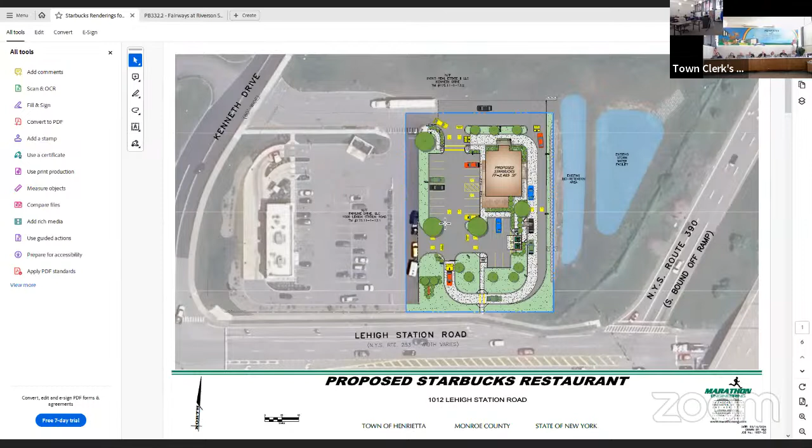Did Luke mention Chris's paper? I had a piece of paper today, it's on my list. I left it right over to him at the end of the engineering meeting. I'm all set, I kept it. Luke, are we good? We're all set, yeah.

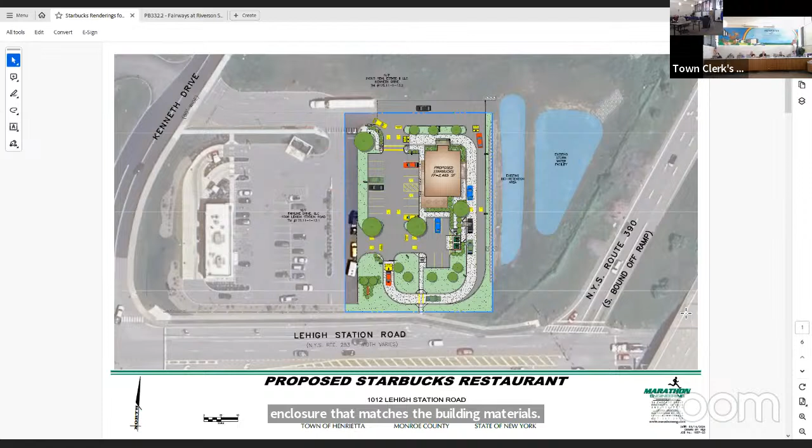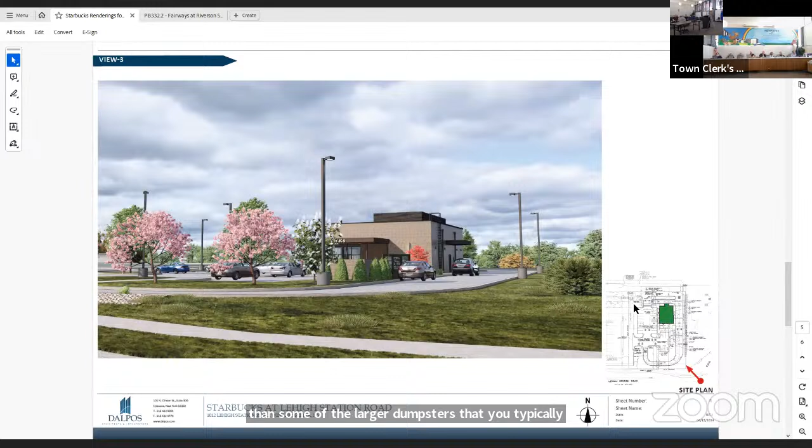We've got a couple of representative visuals from the Lehigh Station roadside that maybe we can scroll through while I'm talking through this. We're also proposing to build that dumpster enclosure at 5.5 feet high with 4-yard dumpsters inside, which are 5 feet high - a little shorter than some of the larger dumpsters you typically see on a commercial site, because we feel this is the least obtrusive location and we're able to screen it as best as possible relative to the views from the external portions of the site.

With that, I'd like to turn it over to John real quick to talk about the building and materials. And I believe Raphael has a box of some of the materials for the brick and wood cladding pieces for the board's consideration as well. We've got those - thank you very much for bringing those. Great, John, you want to talk about the building material a little bit?

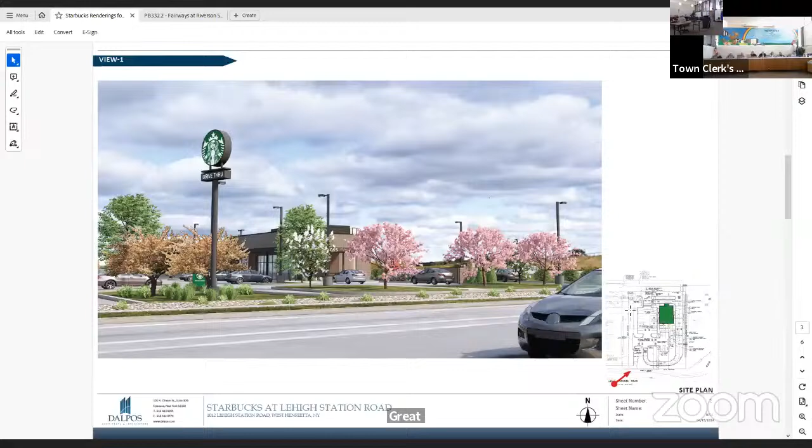Sure, it's organized pretty simply. There's a brick and a wood on the facade. As you're looking at this elevation, the higher level is all brick and it wraps down on the lower left side, as you can see by the Starbucks sign. It's all one color brick, and we just have a different orientation of the coursing - one is stack bond and one is oriented vertically. So on our drawings you'll see brick 1 and brick 2, but it's all one color.

And it's the light color, which I think you have a sample called Manhattan Smooth. That's the brick that's all around the building. There's also a wood - there are 2 colors. The majority of the wood around the building is the lighter brown color, called Weka, W-E-K-A. That's what you're looking at underneath the canopies, on the facade, either side of the glass. That's right, yep.

If you go to the next one, I can walk you through that as well, just so you understand the colors. Same brick right there, same wood underneath the canopy. And as you go around the next two elevations, it's the same brick. On the drive-through side, which would be the following one—keep going, I think, right through. One more—oh, we don't have that view on this one. It'd be on the other side, the other elevation.

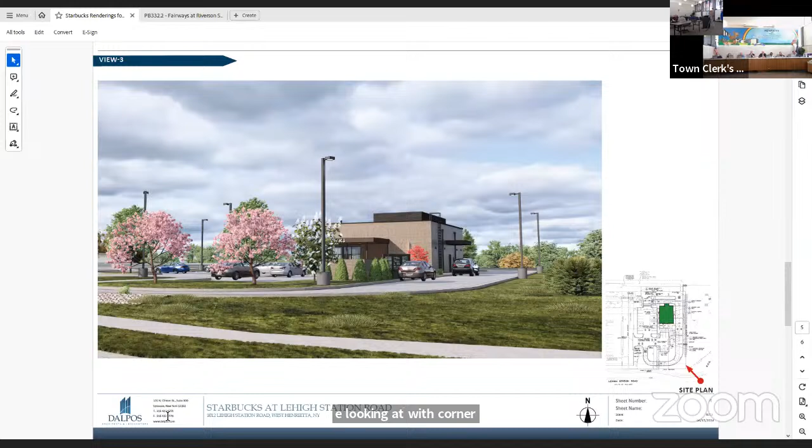And the dumpsters are behind the car—there's a, or behind the green evergreen shrubs. They're also clad with the brick to match the building, so they are pretty indescript. You really don't see them; it kind of blends into part of the building.

And I think if you back up one before this, one photo—this is from the opposite direction. You can see again the green evergreens there, and the dumpsters are behind there. They have enclosures in front, which is colored to match. It's a swing gate which has solid wood slats on it that matches the same color as the brick.

If I understand it from the last meeting, there were some concerns on what this would look like on this elevation. I think we've tried our best to make this blend in with the building, keep it a low profile because it's a very small dumpster, not the size you would normally see. I think we've tucked it in a corner. Matt's done a really good job on site design to get a spot where it's functional, but yet remote enough to not obscure the vision of the building and not stand out from a presence from the street.

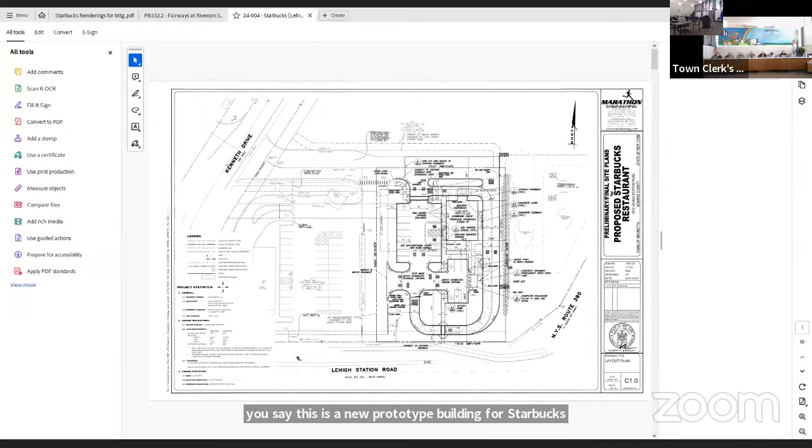Thank you. I really like the aesthetics on this project. Did you say this is a new prototype building for Starbucks? It's a similar building, but a newer color palette and design features for the facade, so it's slightly different than recent built ones. I'm not sure exactly the date these came in, but I know they're relatively recent, in the last couple of months. You've got one up at the corner of East Henrietta and Calkins Roads, and this one to me is much more attractive than that building. So I like this a lot.

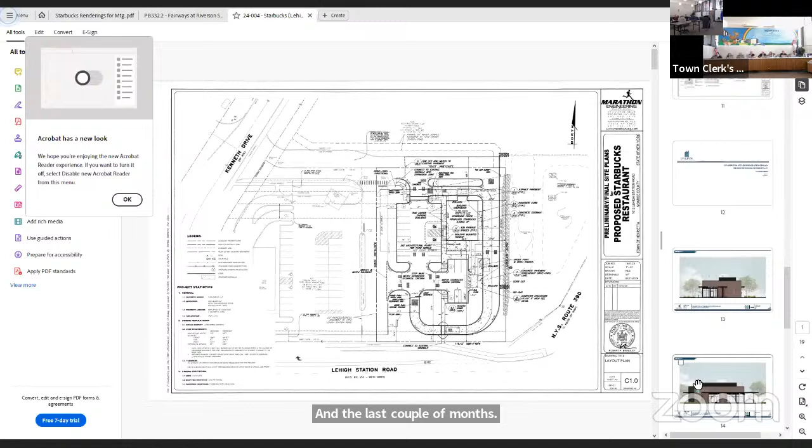Thank you. In the elevation right there, you can see on the far left side is the dark colored wood. That's the other sample we have, which is called Unagi, I think, and we've got it labeled as WD2. Yep, that's the only spot that dark wood shows up. Great, thank you.

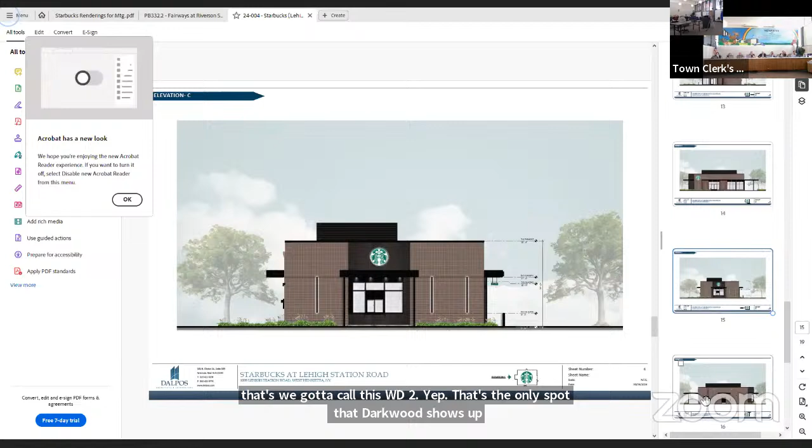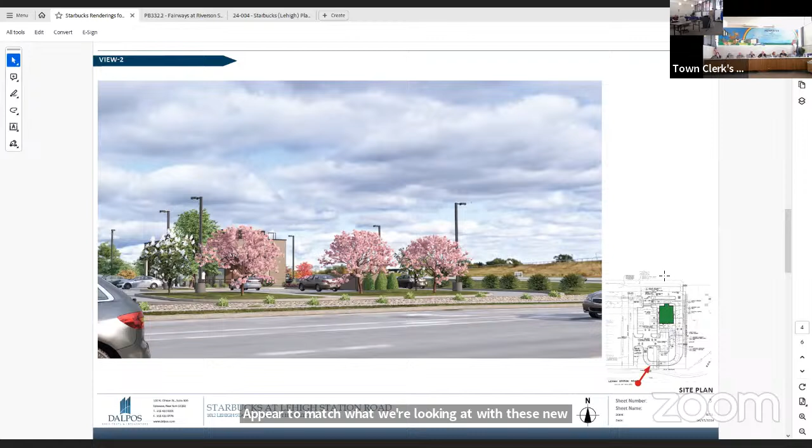I guess maybe I'm disoriented, but the plans on the architectural elevation don't appear to match what we're looking at with these new isometrics. Is the drive-through pickup window on the north side? It is, that's correct. But this small slide shows it on the east side. There's a small canopy over the egress door there for employees taking trash out, that kind of thing—that's not a drive-up window, that's a service door. Okay, I was—so I apologize, that was my orientation issue. That looked like a drive-up window cover.

Okay, so going back to some of that facade, I think there was a comment from the Conservation Board, maybe to dress up that east side. I know you do have four visible sides here, but the back end of your restaurant, in a sense, faces a very busy 390 off ramp. So I don't know if that can be facaded to maybe look a little more storefront with some windows or something. Yeah, great question, Craig. The Conservation Board had our straight-on elevations, but not these perspectives—we didn't have these done in time to get to the Conservation Board. There are some wall sconces with lights on there, and the canopy itself is intended to help dress that up a little bit.

Because this is the back wall where all the kitchen equipment and everything else is, I'm not sure that we can add too much more. Although I do know that the owner intends pursuing approval for a sign on that side because of the visibility.

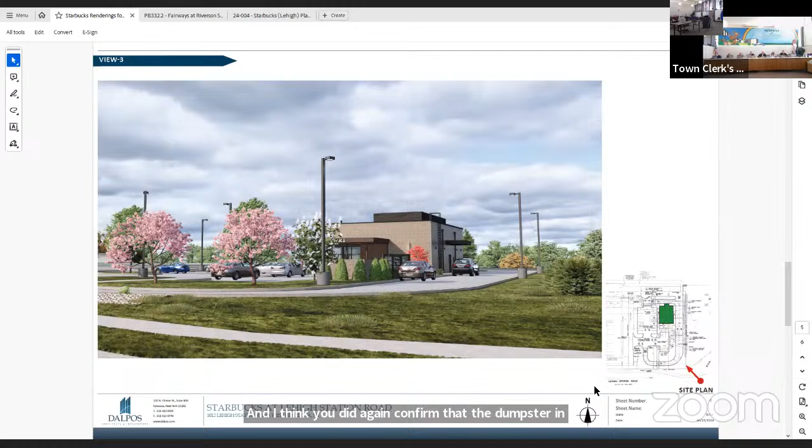Going back to my comments, you mentioned the dumpster enclosure. I like it, I know we're acquiescing to a 5-foot enclosure so it doesn't block the front entrance. And I think you confirmed the dumpster in there will be lower than the 5-foot enclosure? Correct, and just to clarify, the enclosure will be 5'6" because the dumpster is 5 feet high. So we're going to 5'6"? Yep, okay, good.

That probably works. I know we usually go to an 8-foot board, but that was going to cover the whole front end of this, we thought. So we are taking a look at some of that going forward with maybe some alternate height changes.

One of the other comments I had was really kind of internal. Did we take dedication to the sewer yet from Taco Bell? No, I believe it's ready to take dedication - don't let Heather yell at you, or I will. Thank you, Mr. Eckert. You're welcome.

So yes, we haven't taken dedication yet, but we plan to at the May meeting. Okay, so that's just paperwork on our end to make sure that tying in and everything works well for you.

One other question that I had was based off of lighting. I see a 25-foot pole here. I couldn't tell, looking at the plans that were approved for Taco Bell, the height that was approved there. I'd like to see if it would be similar, but I can't tell if 25 was approved or not.

And then the second question that goes on this, something that I've been asking for going forward, are comm checks on lighting. So if we can get a comm check, which is an energy code compliance anyway, get a copy that it meets the comm check.

Okay, yeah, typically we would have something like that accompanying the building permit, Craig, but we could definitely advance that if needed. These are LED lights and no issue, I don't anticipate meeting that.

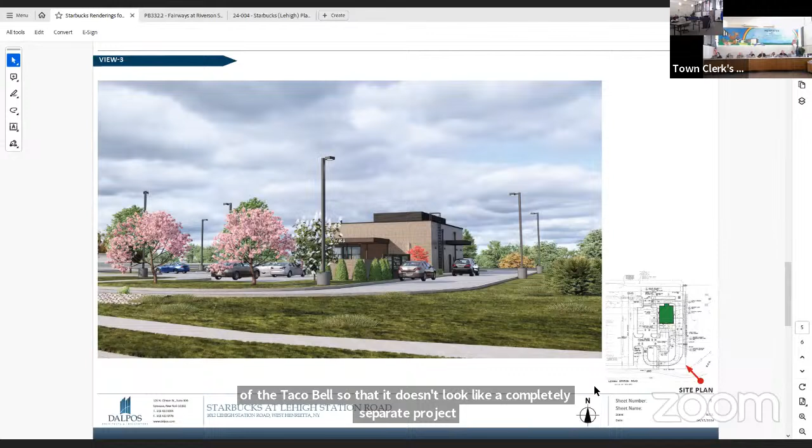And that's fine, so matching is fine, I just didn't want them taller. You're welcome to go lower if that helps your ambiance and helps your light spread a little bit better. I'm not opposed to lower.

The comm check can come in with a building permit. There's no need to advance that as long as it gets brought in with the building permit, we just make sure we catch up with that later. Okay, those are the end of the comments that I had, Mr. Chairman.

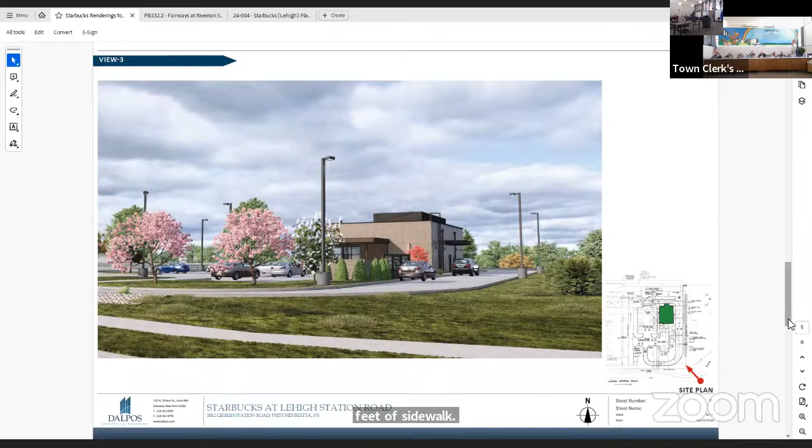One thing, I know you talked about the covered patio, and I see on both sides of that patio you have about 7 feet of sidewalk from where the cars will park. Is there going to be an extra barrier if a car jumps a curb, like a wrought iron fence or something? Yeah, I believe there's a low fence shown there, but Starbucks does have patio enclosure requirements that attach to the columns supporting that.

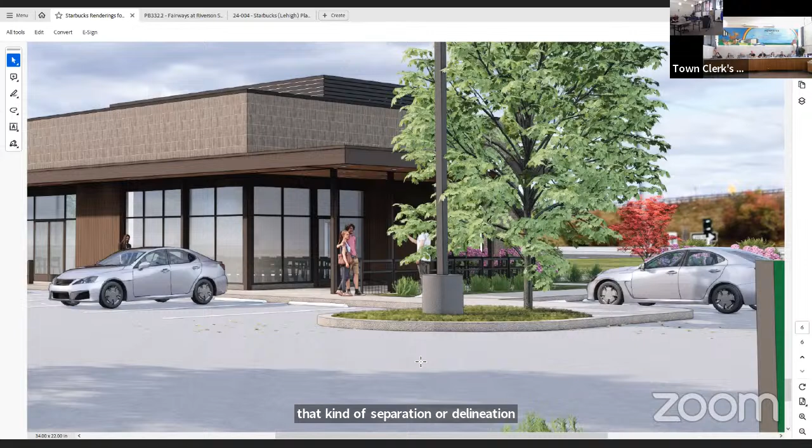So you're saying the columns act like a bollard? Well, the columns are there, but there's fencing between the columns for that separation or delineation. I'm just talking about something strong enough that if a car does jump a curb, we're okay. I'm not aware of any special protections on those columns. I don't believe they're intended to retain a vehicle.

So Chris, have we ever made anybody do anything structurally sound like that? Typically with outside patios, we just make them put some type of fencing around there, as you said, to prevent kids from running into traffic. And the curb is there to stop vehicles, obviously, and we will have full depth curb through both of those sections. Yeah, and I can see that on the elevation, so that's cool. All right, thank you, that's good.

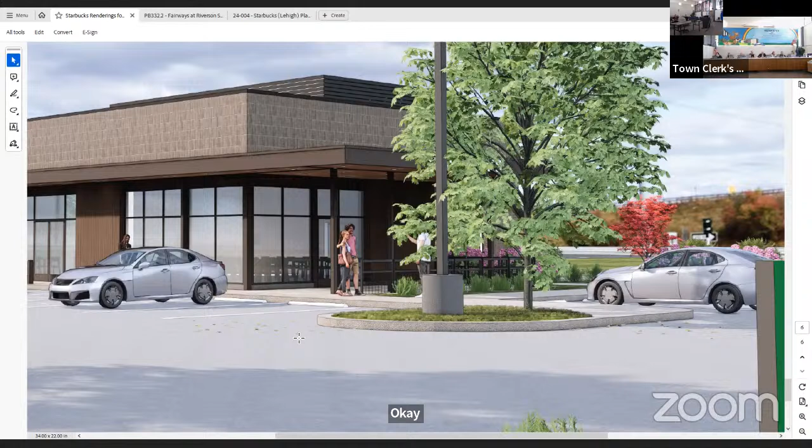I guess we can wait a bit. We just gotta make sure that we do something about the variance on the setback. Yep, and that's all I have, thanks.

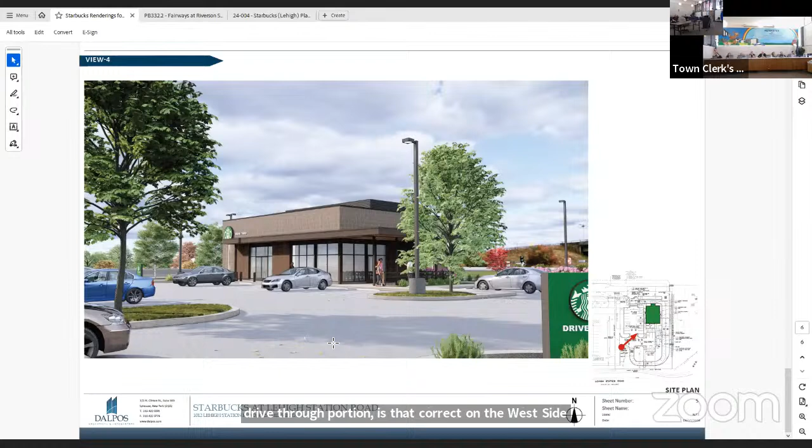So if I'm looking at the traffic patterns, there's two ways to get into the drive-through portion, is that correct, on the west side and the north side? Both of those drive lanes, if we could switch back to the colored rendering. Yep, both of those drive lanes are two-way drive lanes on the north side and the west side, with a single entry point proceeding south from where the cursor is into the drive-through. That's correct, so that's where the clearance bar would be located, right at the start of that concrete paving area.

Gotcha, and thank you. And the sidewalk that goes across the drive-through out to the sidewalk on the south along Lehigh Station, is there going to be any type of safety barriers? I don't know why there might be foot traffic coming across there because there's not really anything across the street, other than some businesses. So what type of safety precautions would be in place?

We are showing a striped crosswalk there and could entertain a pedestrian crossing sign as well. We do not anticipate a lot of pedestrian traffic, but accommodations were made for pedestrian circulation internal to the development and out to the public right of ways, so we are also including connection to the driveway that comes in along Kenneth Drive, to the sidewalk and crosswalk there for folks walking from adjacent businesses or along either Lehigh Station or Kenneth.

Okay, thank you, that's all I have, Mr. Chairman. Thank you, Mrs. Reynolds. Chair will recognize Ms. Safranek. Good evening, I think most of my questions have been answered. I do appreciate the thought that has gone into the landscaping and the design. I think that's going to be a nice addition.

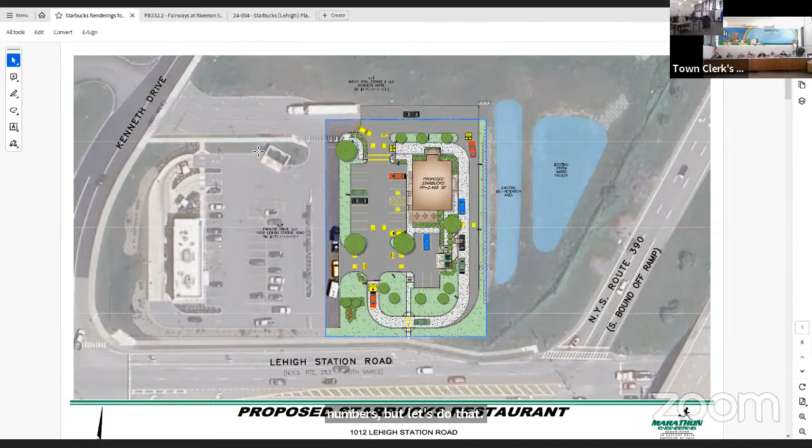Motion for the variance. I don't have the actual numbers, but let's do that for the setback distance: to reduce the rear setback from 60 feet to 39 feet.

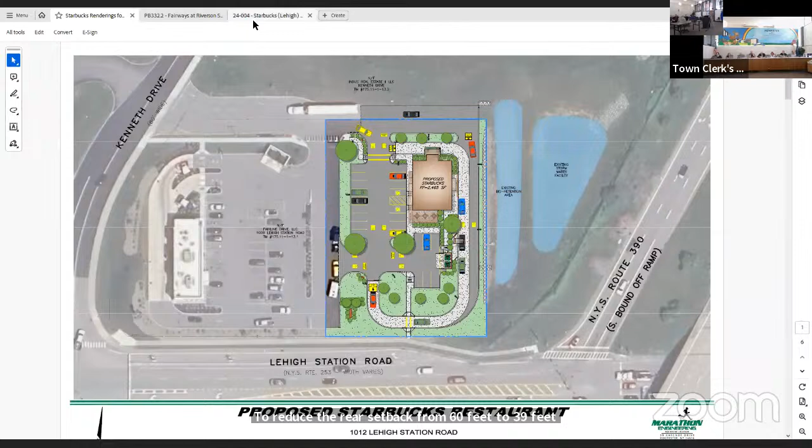Very good. Do I have a second, please? Second, thank you Mrs. Reynolds. Discussion? All in favor, say aye. Aye. All opposed, say nay. Okay, we have a setback reduction. Thank you, everybody.

Mr. Martin, any final comments on the application itself? Just SEQR, Mr. Chairman. Okay, thank you. Mr. Young, did you have any comments at this point? Nothing beyond my written comments, Chairman. Thank you.

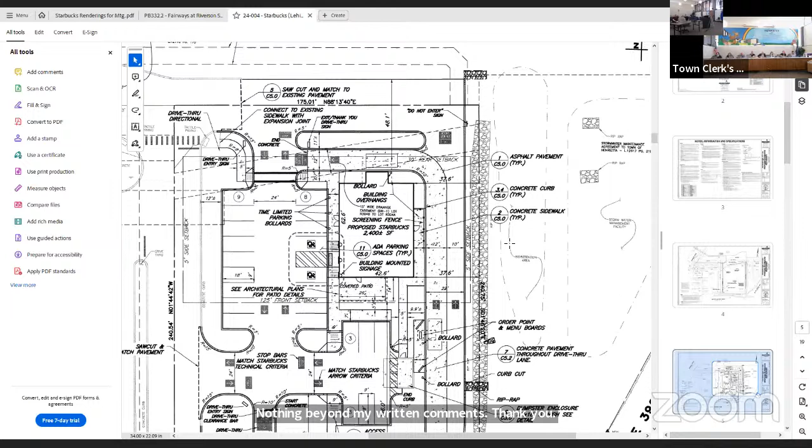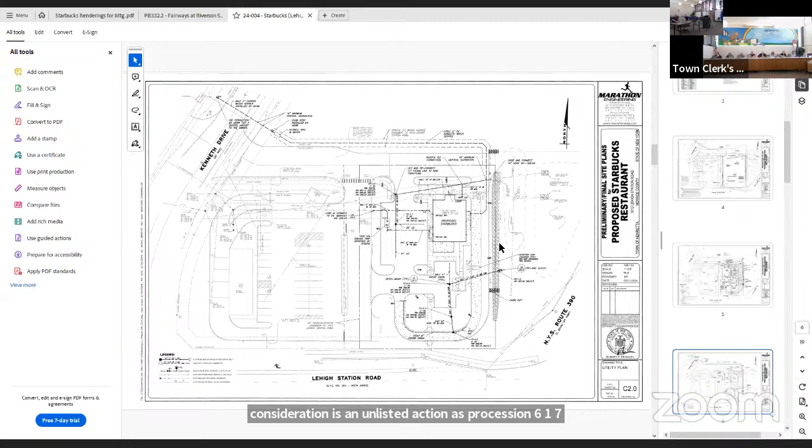Okay, SEQR review indicates the action under consideration is an unlisted action per section 617.7 C1 VIII. The Henrietta Planning Board, as lead agency, has determined that the proposed action described below will not have a significant effect on the environment and that a draft environmental impact statement will not be required. The action under consideration is a site plan application by 1012 Lehigh LLC. It is an unlisted action and will not require a conditioned negative declaration. The purpose of this application is for final site plan approval of a 2,400 square foot restaurant located at 1012 Lehigh Station Road on approximately 0.97 acres in an industrial zone district.

All relevant areas of environmental concern were identified. Evaluation and examination were carefully made in relation to the existing conditions versus the proposed site improvements. It's been determined that there will be no adverse environmental effect as a result of the proposed action. So I, James Brunert, make the motion that we make a negative declaration and that the chairman be authorized to sign the statement of environmental significance.

Second, thank you Mrs. Brill. Discussion? All in favor, say aye. Aye. All opposed, say nay. In the opinion of the chair, the ayes have it. Motion carries. We have SEQR.

Okay, the chair will entertain a motion. Mr. Chairman, I'll move on application number 24004, Starbucks, for final site plan approval. Thank you, Mr. List. Just check.